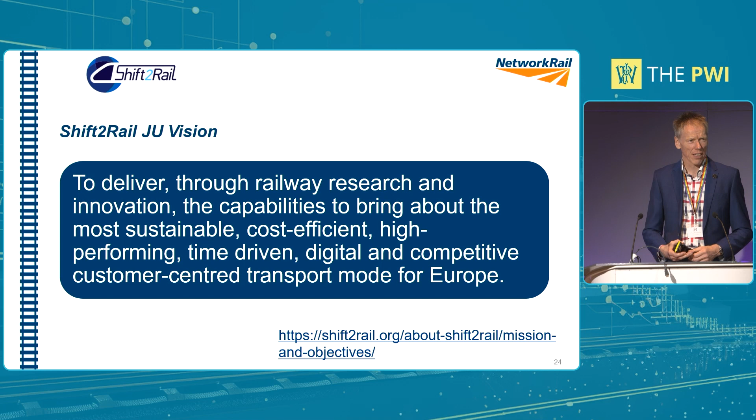The other advantage of having Shift2Rail as a project, with In2Track3 in this case, is that you can actually look at work that's been done by all the other partners that Network Rail maybe isn't involved in, and we can still call on that information to try and look at where we want to take innovations out of that project and what we can use that for. So there's a raft of projects going on. Network Rail's projects, I think we have around 25 going on at the moment in this project.

So Shift2Rail's been looking at innovation programs for the last 7 years. There's various different IPs, innovation programs. We're really talking about IP3, so track infrastructure, looking at how we can make it more cost effective and more reliable with what we've got in track now. But also the other part of that is looking at next generation - what is the next generation S&C going to look like?

So the joint undertaking, part of the European Union, asked us to look at a horizon of 40 years in advance. Quite a difficult thing to do because clearly we don't know what technology is going to be developed during that time. So we're trying to stretch where we are now in terms of technology knowledge and move forward with something that's tangible with technology as it currently stands. But clearly there's a question mark about what technology is going to change in that 40-year period as to what we can do next.

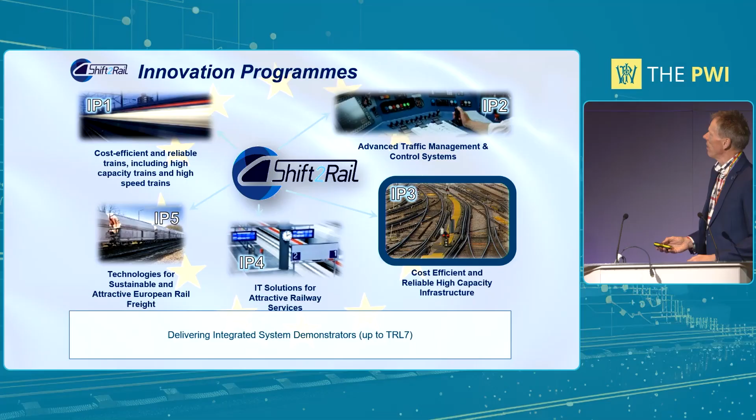So Shift2Rail has had all these projects. Starting back in, I think, 2016-17, In2Rail was just another satellite project to look at setting the scene from a point of view of what do we want to do, and how does it actually work forward.

Then it started with In2Track. That's talking about track work in terms of looking at issues we currently have with our current network, current type of S&C and plain line, and what sort of defects and problems we need to try and find a way of designing out, finding a solution to help us maintain it better and get it more efficient with what we have now. And also looking at what the next generation is in terms of S&C and track.

But what happened with the In2Track projects is we're talking about a very low TRL level at In2Track itself. As we go through the projects to In2Track2, In2Track3, it's just increasing the TRL levels of those particular work streams to look at what actual stage we can get to in In2Track3. Well, we've got to TRL 5 and 6, so we're talking about prototypes, first of type, proving technology.

All these other projects, which I won't go into too much because it'll take too long to explain, are basically all little stepping stones to move forward from one project to another, all funded by the European Union. So clearly there's an awful lot of work going on through these projects, which unfortunately it sounds like not many people know about.

But clearly we need to make sure we shout from the rafters about what's been going on, because some fantastic pieces of work have been progressed through these projects.

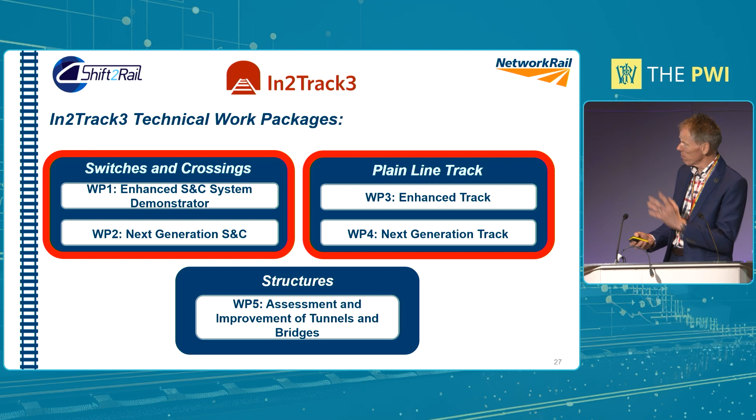So clearly, from Georgia's presentation about what HS2 are looking forward to, that's obviously looking at innovation and trying to change what we do and make it more reliable and cost effective in terms of its whole life cost, which is where this is hedging to go forward with.

So a few things we've been developing through this project, across In2Track2 and In2Track3, are things like this. Work I'm involved with, University of Birmingham, have basically been looking at trying to put sensors on a crossing. You think, well, that's not novel.

Well, it is in a way, because we haven't got a portable system that, from a TME's perspective, you can't just go and put something on easily on the crossing itself. There are other Konux systems, other yellow tech and other things around that do similar things.

But this is really looking at the acceleration of a wheel set going over the crossing, from wing rail to nose. Obviously we've got an issue with wear and tear, having a height difference between the nose and the wing rail - you get more acceleration as the gap gets bigger.

So if we have parameters in our standards that say, if you get a height difference between the wing rail and nose of X millimetres, whatever that is, if you go above that parameter the chances are you'll get a cracked crossing - that's the sort of information we don't have for our TMEs at the minute, out there trying to manage their crossings, and we don't manage crossings as well as we should do.

So having something like this that could give that parameter and information to a TME, they should hopefully be able to act on that. Obviously we can give them all the information they want, but if they don't act on it, it's not going to be of any benefit. But we have to give them the tools for that job. So that's what University of Birmingham are looking at.

So we're going to a site in Bawtry to look at that on the East Coast Main Line with Soren, to help us actually put one of these on track and see what information we can see from a real life situation.

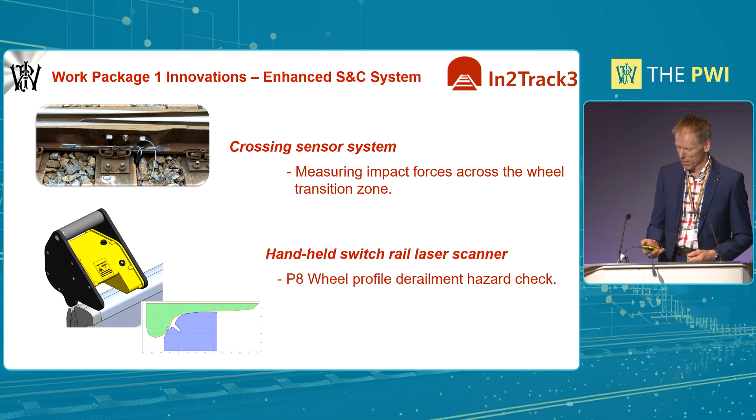And the three lines there you can vaguely see have the different angles of contact that might actually mean we've got a derailment issue or not. So it's taking the human factor issue out of that. So that's at the stage where we've got now a prototype ready to actually go out and showcase and show people what it actually does. So anybody at Rail Live that went on the APTA stand, that was there, along with another one that they're developing. Another one we're looking at the moment, which was at Tuxford's RIDC site yesterday, is the RFID tag.

The reason why this is quite key for us is as Network Rail evolved from British Rail to Railtrack, etc., computer systems started being generated to actually allow us to look at where S&C was situated. So people might remember GEOGIS. That's obviously now obsolete. It's all been morphed into what we have in our S&C Ellipse database. But unfortunately, all these legacy systems are saying the switch and crossings are here, maybe 4 or 5 meters further down the line for another system. Another one's saying it's 10 meters that way. There is a lot of confusion as to where the actual S&C is. So to try and actually have some real-time information that can actually show that is what we're trying to achieve in that sense. And we're going to be testing this next month to actually show that the technology works.

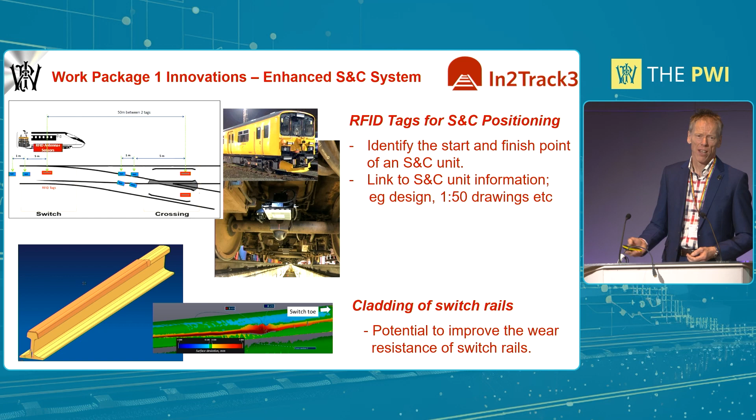Another one, which involves cladding of switch rails, was a difficult question to say whether we actually think this is going to work or not. But effectively what we're going to do is clad some rail; we've got some test pieces that have been done by the University of Sheffield. They've actually clad some rail. We're going to test it on their test rigs to see if it actually has some more wear resistance. So effectively, if we can find that this actually works in terms of the adhesion of the cladding system to the rail, potentially we could then adapt that to something on the switch rail. So we can try and find a way of seeing if we've got more wear resistance on the switch rail, where we can actually add the cladding to make the actual asset last longer. So that's actually going on at the moment with the University of Sheffield and a cladding company.

And one that Jan, who's talking about various things from the University of Huddersfield later on, has been working on: optimising the NR56V crossing profile. So people in the track engineering fraternity might have heard of NR60 Mark II, as that's the latest S&C type that we have, which makes a lot of sense in terms of the work that went into the geometry of that. So they optimised the actual crossing profile of that type of S&C at the time of the design. But NR56V is sort of the old 113. It's never really been updated that well to bring it up to state in terms of the requirements of our infrastructure, trains, wheel sets, etc. So Huddersfield have done an awful lot of work on modelling the multi-body simulation of what the actual profile should be to reduce the impact load and the acceleration as the wheels traverse that area.

So there's two crossings that are on order at the moment with Progress Rail. They're going to be delivered thereabouts in the middle of September, that we can install at a junction somewhere near Nottingham, and we can assess how the actual profile actually marries up. And clearly, if we get the right data back and get the information we're hoping to, we can change the profile of our crossing going forward to actually make the asset last longer and make sure it actually performs much better than what we do with the current situation.

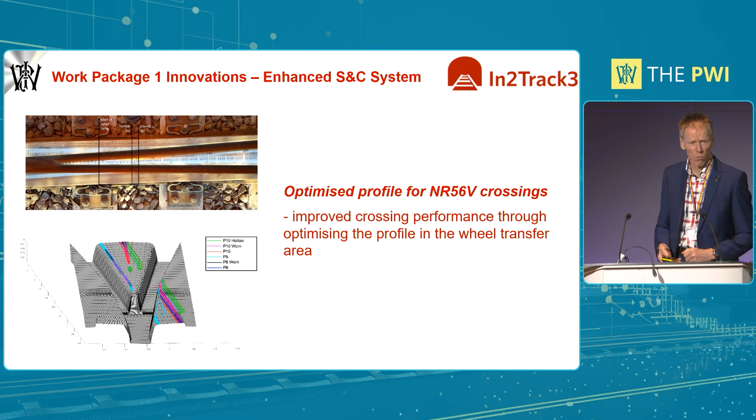And another one, 3D printing of components. You're thinking, well, 3D printing is blooming expensive, which it is. But when you look at the amount of different S&C types we have, the 90 different components that means we've got, there is some sort of scale of cost there.

That means if you have something come off of an S&C unit and you need to replace a particular bespoke component, it could take 12 months trying to find the actual mould, if it still exists, if it's an old one, and also the cost of getting that actually manufactured. Clearly, the timescale between a component breaking and being needed and the casting process being able to manufacture that might be a long lead time. So clearly that might mean we have lots of Schedule 8 payments because we've got a speed on an S&C unit. We can 3D print something in a week or less.

So at the moment we've got two components, which are these two, a stress transfer block and a housing, that have been 3D printed, and we're going to put them on the testing, which basically is the fastening system tests for the EN fastening system that we would normally expect all our components to go through. So once we've got those done, then we'll put them on test. The shapes that you see on the right-hand side of each of the components are the shape that we're going to have, not the actual original one.

Effectively, the company who's been working on this has optimized the actual shapes, so they can say, we can save this material. We can reduce the amount of material needed, we can reduce costs, but it still maintains the integrity and the performance we expect from that component.

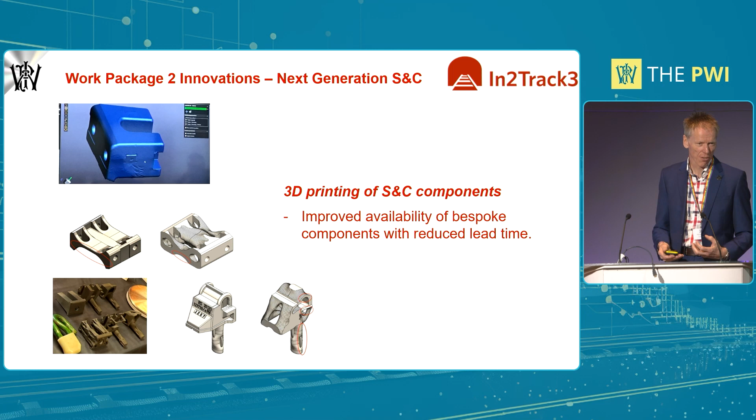So again, we're stretching the boundaries about what we can do with areas where 3D printing might be something we can use. And obviously, the additive manufacturing side of things means we can play around with the material type to give us different requirements in terms of what performance we need on certain aspects of that component, where we get the wear, etc. We can change what that component surface is compared to the main material. So it gives us lots of possibilities to try and expand on that technology.

And how many people have heard of Repoint? A small number. Repoint, for those who don't know, is a concept that the University of Loughborough brought together about changing the type of switch rail we have to move trains from one track to another. Instead of having conventional switches, stock rail and switchblade, you have this system.

Now, I don't know if this video will work. We shall see. Oh, there you go. So it just moves the whole rail, full head section to full head section. So effectively, that's what the concept is. It's nothing new, because if you look back in the 1800s, it was something that was mooted about then, but clearly the technology wasn't around to make it happen.

So we've been working with the University of Birmingham, who've taken this on from Loughborough to develop it as far as we possibly can, more on modelling than anything else at the minute. But we are creating one of the bearers that they've got there, the three bearers at the top. They're the drive bearers that lift everything up. The ones at the back are just there for more support than anything else. And that will actually give that motion to move it in an elliptical movement side to side.

So obviously, we are looking to see as far as we possibly can, because clearly developing something like this is very costly, to prove the concept. And that's the type of joint that they're looking at, to not have just one flat piece of rail butted up against a flat piece of rail, because clearly it's a joint, which isn't going to be good.

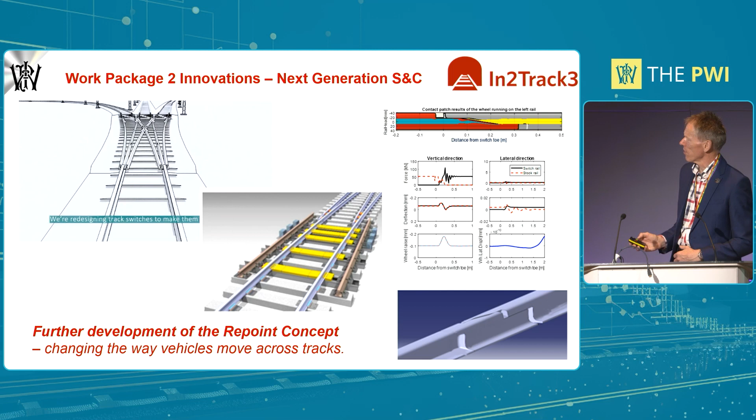So they're looking at something that's obviously similar to a sort of expansion switch type arrangement for that. So that's, again, what we're trying to move forward in In2Track3. And there's a bit more about the bearer itself for moving the actual rails up and down and across the actual change in position. And obviously the advantage of this is we're taking the switch rail out of the equation.

So where we've got O53 derailment hazards, we've got problems where we need competent people to actually do the checks. We need equipment to look at that. We have the derailment risk because of the lateral forces on the switch rail. With this, it's more going to be like a train wheel going around a curve than actually having the switch rail. So it gets rid of an awful lot of the issues we currently have. Yes, it introduces some additional risk with that joint, etc. But again, it's looking at what we can see from the next generation type of S&C in future.

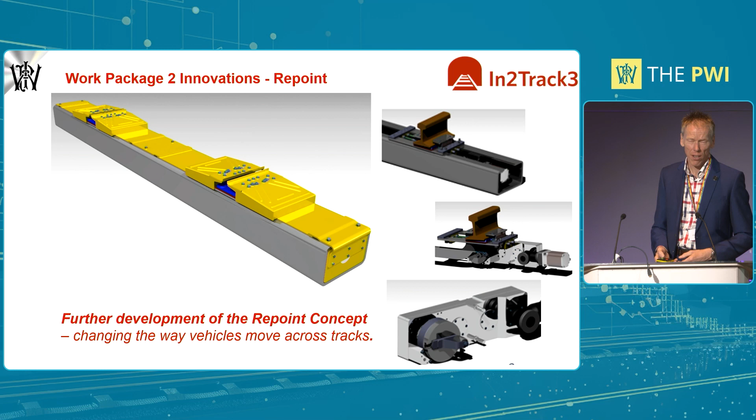So this takes still photographs. The software knits them together, gives you an orthographic 2D view and a point cloud view. So we can then zoom into that footage quite closely. You can take dimensions from it. You can look at issues with pattern recognition, which Mark will talk about later on. We're also developing pattern recognition for componentry, clips, etc., which we've proven does work, because if you put two inspections together from the same S&C unit over maybe 3 months, you can see clips and things like that moving in terms of the footage difference.

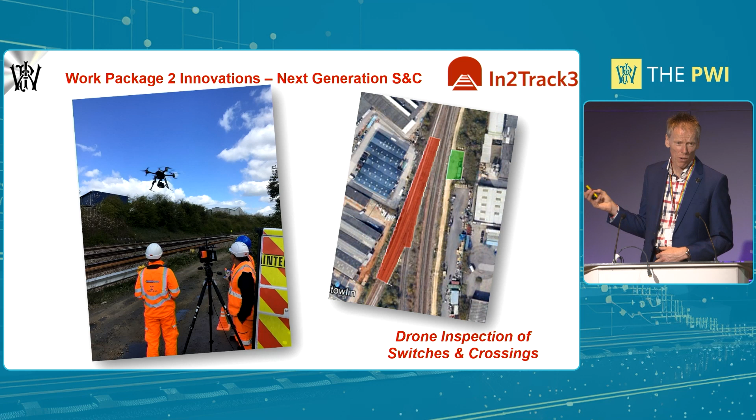So it's quite an intelligent thing to try and emulate, using drone footage, something similar to PLPR, which is where we're heading. So again, moving forward with what we're trying to achieve with our inspection processes and keeping people off track. And this can be used while trains are running. So it's not a case where we're going to interrupt services to do inspections as we currently do most of the time. And that's the type of footage you can see.

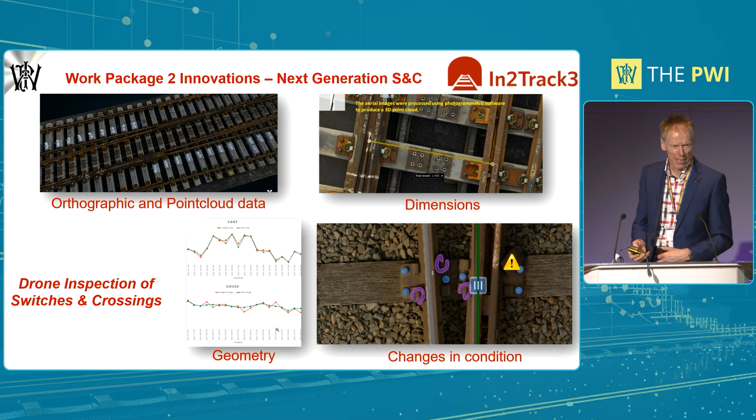The bottom one is the one I was saying we've highlighted on the componentry. I can't move the cursor on this one because it's just a still photo, but if you move the cursor backwards and forwards, one of those clips either moves or it's missing in the next footage. So from that green line, you have one inspection on the left-hand side, one inspection on the right-hand side. Same footage, different dates. So that's a quick and easy way for people to see what's happened over time in terms of changes.

And you can take dimensions as I showed you at the top there in that photo. And one or two areas on the graphs there, looking at cant and gauge. That was an early version we did in In2Track3. But you can see there are some areas where we can use that footage to look at cant and gauge by measuring and putting different values in there. I think the red is the manual track gauge, and the green is what the drone footage was able to show. So there is quite a good correlation that needs some work, but obviously it's close.

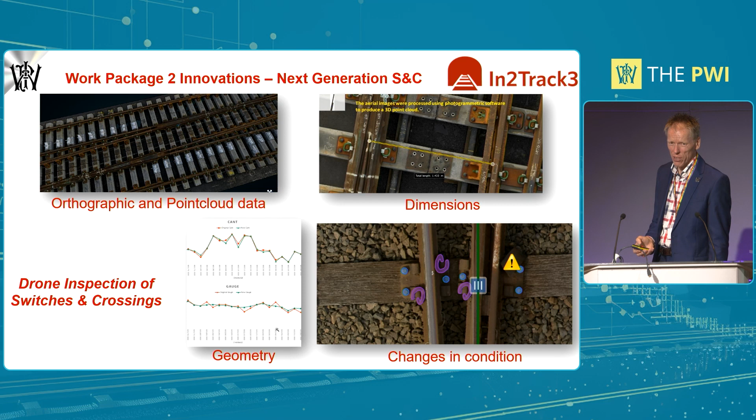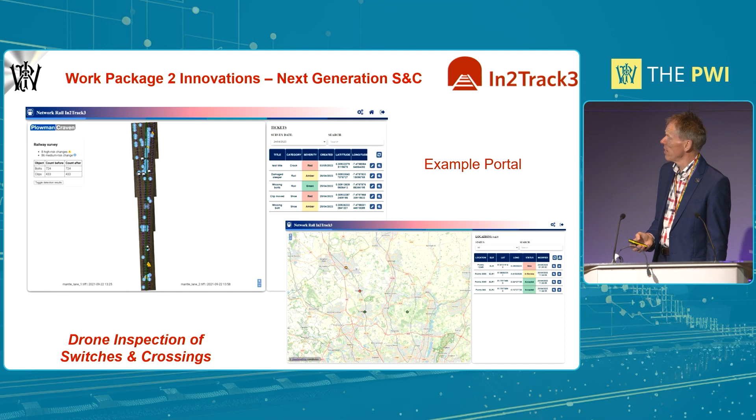And having a portal to actually show a section manager or an inspector how they can look at what the actual inspection's done. This is another thing that Mark's actually helping develop with his team, and how we can look at this as an inspection tool in the future.

Lastly, anybody heard of discrete defect repair machine, DDR? One or two of you. So this is a big program where we've actually been looking at an S&C version of the DDR.

The DDR is a discrete defect repair machine for repairing defects in plain rail autonomously, by putting it over the defect, setting it up and pressing go. It mills out the actual defect, deposits weld material to build that cavity up.

Then it mills it back to profile either side of the actual defect. We're also pushing the boundaries to get one that's able to do the same for a crossing. This is showing the actual details of how they can mill out a crossing using a plain piece of rail in this instance, so we're not wasting crossings.

Moving forward from the BV1000 situation, you can automate repairing a crossing by having the wing rail and the crossing nose repaired at the same time, making sure the angle and profile from the geometry requirements and the height difference, in terms of keeping a stable situation for the acceleration the wheel sets will put on the system, are maintained regardless of the actual wear either side.

The DDR measures the profile of the rail using lasers before and after the repair is taken, and it merges that in when blending the milling of the repair, getting it to a state where it blends into either side of the repair rail. It doesn't have a big lump or anything like that after the repair's carried out.

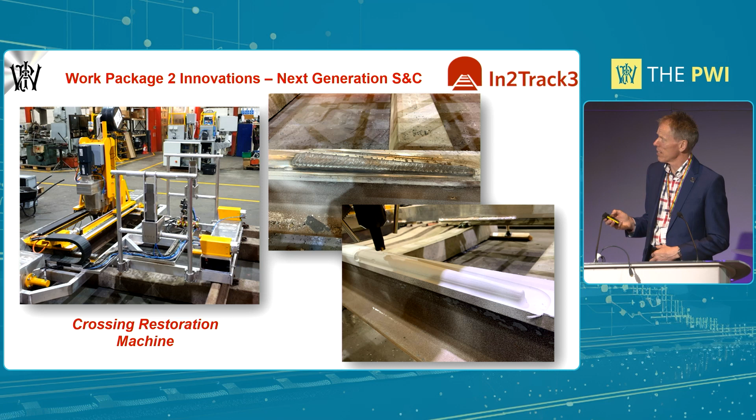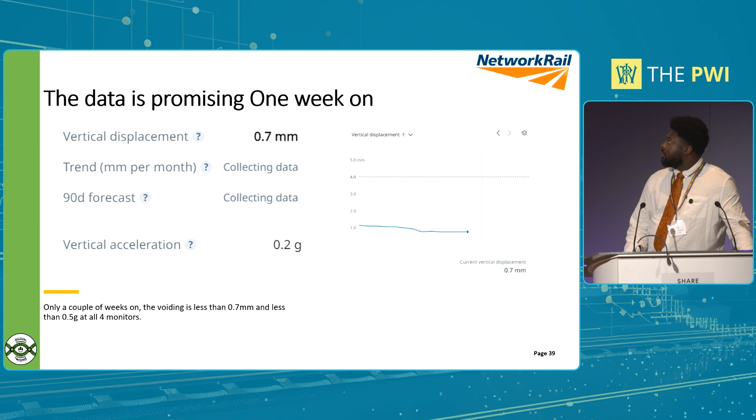As you can see from that data, we had some Konux monitors on, and it looks really good. It's essentially as flat as a pool table, so it's exactly what you'd want to see a week after doing an installation.

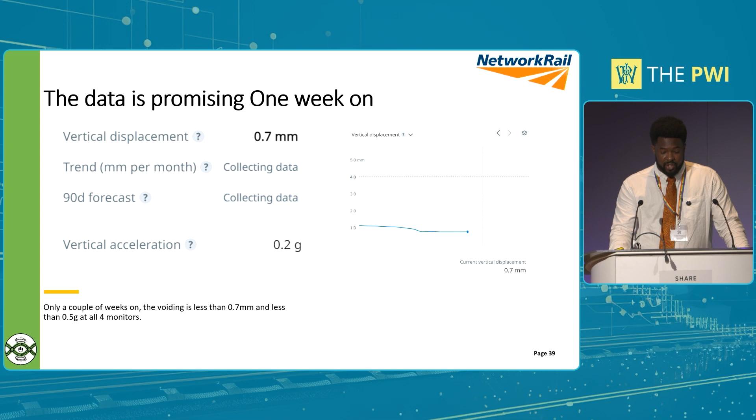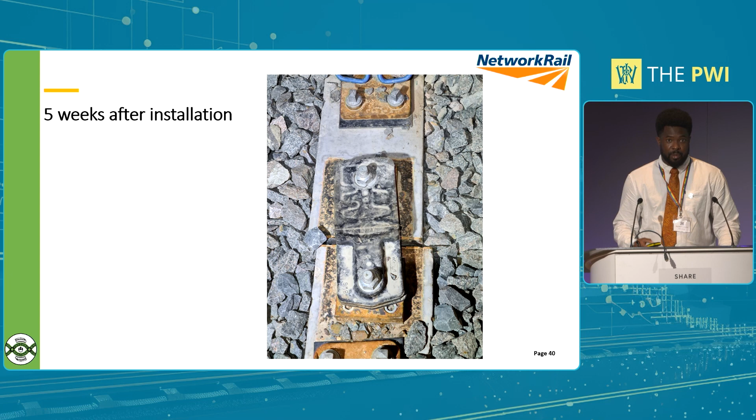So out on the inspection, we had some manufacturers - we had Voestalpine come out with us. As you can see, that little green mark there is a fleck mark they put on in the manufacturer's yard, and it's very slightly not lined up there. It's 2 or 3 millimeters not lined up.

That was the case for quite a lot of the bearers, but quite a few of them were still aligned. Then you can see on that blue photo, we've put a new fleck mark on, so when we go and do a new inspection, we can see whether or not it's still aligned.

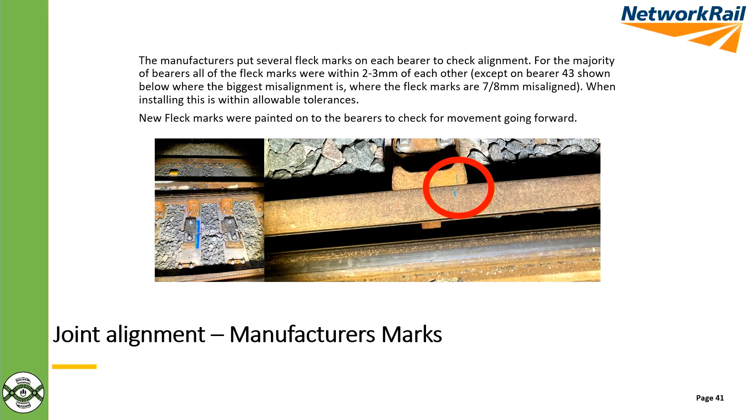Now, this slight misalignment may have contributed to the total misalignment we've seen. We can also see this is the sort of direction they've actually moved in - the joints and the bearers have moved in a direction opposite to travel.

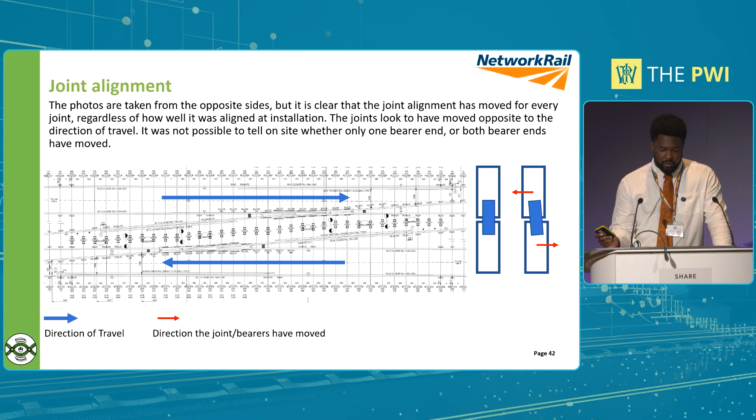Unfortunately, we can't tell whether both ends have moved or whether a single end has moved, because we don't know the exact position of where it was on installation. But what we do know is how much they have moved between the two inspections, the first and the second. As you can see, on the first inspection, the worst ones you get are up at 30 millimeters offset longitudinally.

On our second inspection, we used a slightly more accurate tool and none of those offsets had increased. So from my perspective, it's very unlikely there's been any additional movement between those inspections.

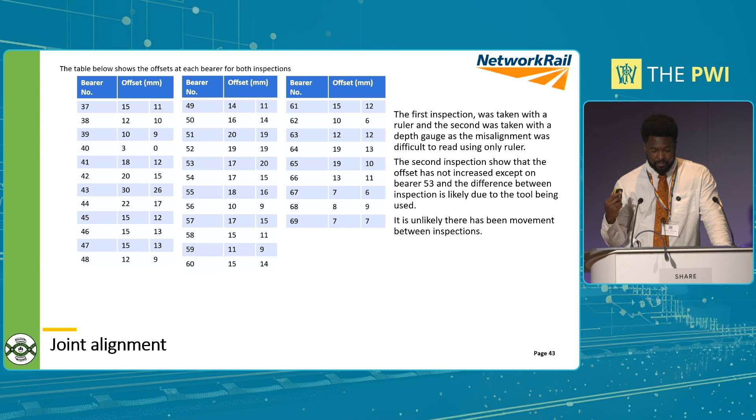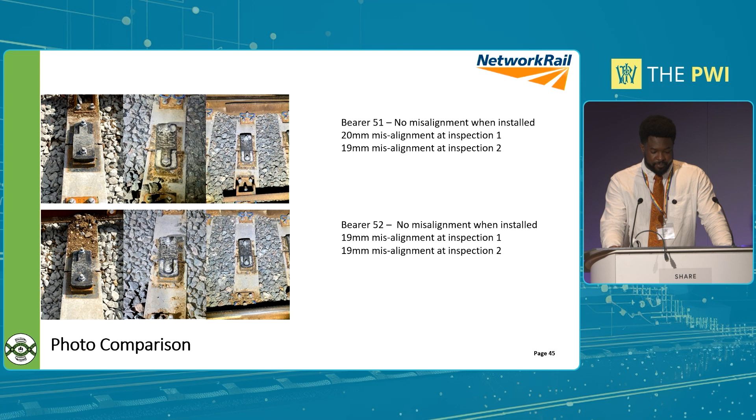However, some bearers were completely perfectly aligned on installation, and those moved up to 20 millimeters at the first inspection and 19 at the second. So what that means is there are some that moved where there was no movement on installation day. Now, some other things we've looked at.

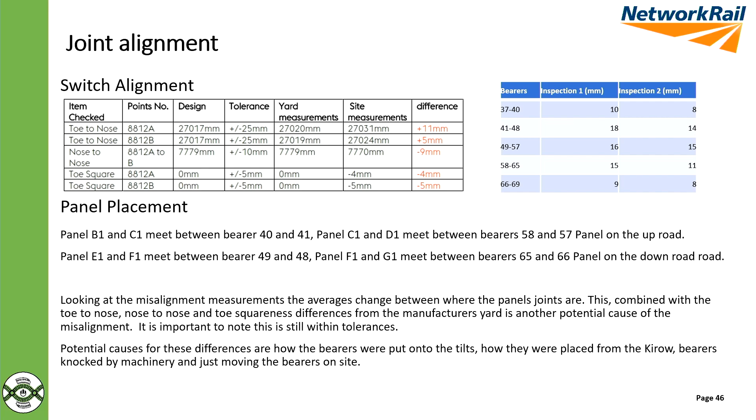If you take the toe-to-nose, nose-to-nose, and toe squareness measurements, all of them were in tolerance at the inspections, but not perfect. Toe-to-nose is +11 and +5 respectively, nose-to-nose is -9 millimeters, and toe squareness is -4 and -5 millimeters on both. Essentially, this means that compared to the manufacturer's yard, these switches are slightly out of alignment, and I think that has contributed fairly significantly to where the longitudinal movement has ended up.

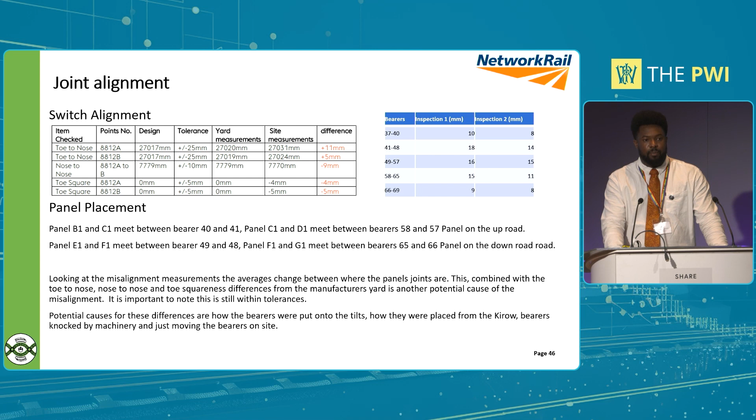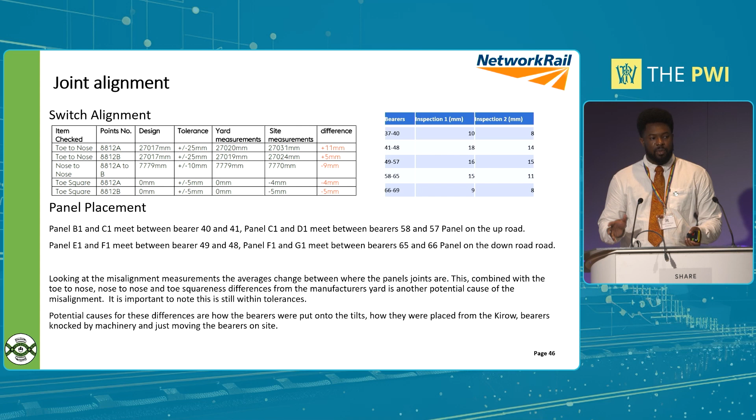In addition, if you separate the bearers roughly where the panels are jointed, you can see on inspection 1 and inspection 2 that some panels have significantly more movement than others. It increases towards the middle where the crossing noses are, then decreases further out towards the toes. The likelihood is that these misalignments come from lifting the panels in and setting them down, since it's very difficult to line them up perfectly. While still well within tolerance, it looks like the joint has taken this difference from the manufacturer's yard and just shifted it ever so slightly.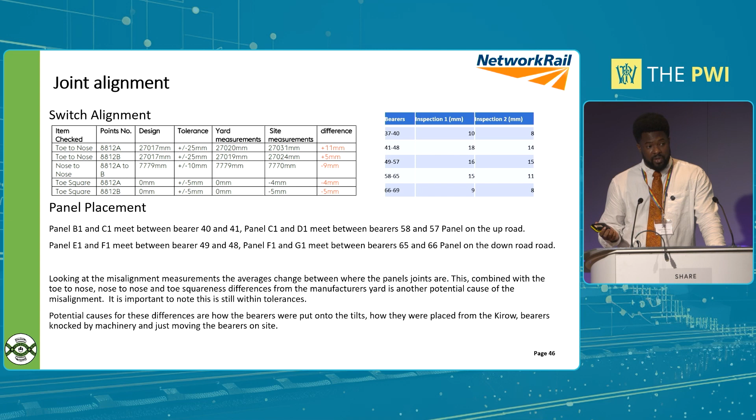The key thing here, though, is that even though there appears to be a longitudinal misalignment, there are no defects related to this. There are no faults, no defects, and no gauge issues.

In addition, I also got an email reporting a dip angle on one of the crossing noses. We looked at the traces and it doesn't look like there's an issue there. When we went out to site, there was no issue with the running band on either of the crossing noses, and watching a train go over it, it's completely solid and flat. So the dip angle that was reported was much more likely to be the design dip angle you get in the freewheel area of a crossing.

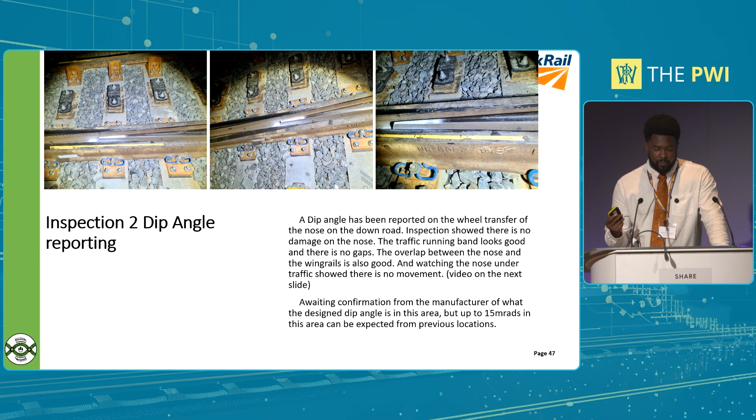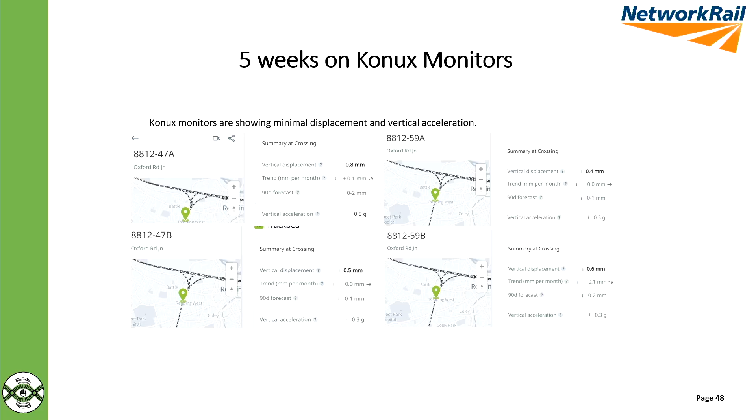So taking that with the inspection we did, I'm happy to say—or I was very happy to say—that the misalignment is not an actual problem. It's just a visual feature that is a little bit unpleasant. There are no defects and no failures associated with it, and the likelihood of one forming from any further misalignment is incredibly low.

The maximum misalignment we had was 30 millimeters, and for us to go down from 1435 to 1434 gauge, it would have to be a maximum of 43 millimeter misalignment. So I don't foresee any problems there.